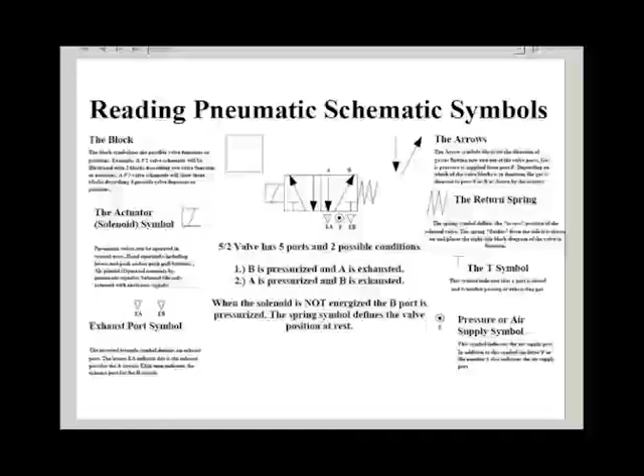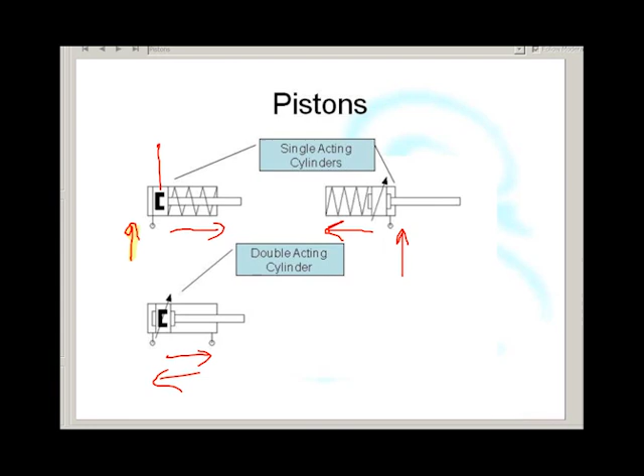In addition, there's some other symbols here. We've got this symbol here. That's a magnet. Any idea why we put a magnet in the middle of the piston? We put a magnet in the middle of the piston so that we can detect where it is. We put a reed switch there and a reed switch there, and you can tell where it is, whether the thing is in or out.

Now, one big problem we have with pistons is that if they're any sort of length and they have any sort of pressure on them, when they get up a lick of speed, they tend to get to the end of their line and smash right through the end of the cylinder, which is a big problem. To fix this, we use a thing called cushioning. What we have is like small sub-pistons inside the main piston.

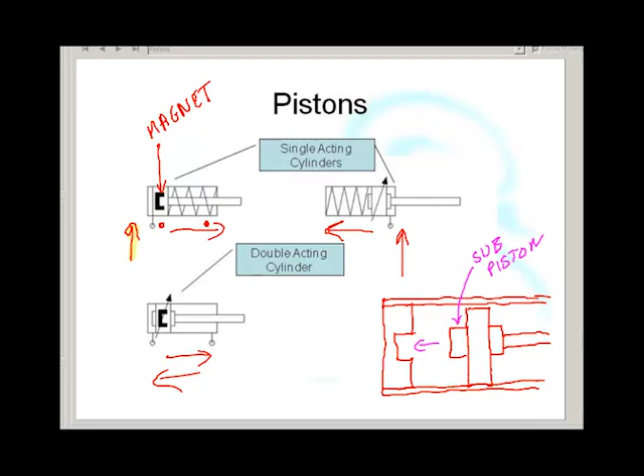And as this thing comes crashing towards this direction, the sub-piston engages in a very, very tight hole in the casting. And from that hole in the casting, there's a very thin air line comes through. And as the sub-piston engages in that hole, it cushions the thing. So it basically brakes it to a halt in a nice cushioned way. Now, the air hole is variable. So by having this cushioning, we prevent the piston blasting out the end of the cylinder.

So these symbols here, they're cushions. That's a symbol for a cushion. And this symbol here, that's variable. Just like in electronics and electricity, an arrow through something means variable. So these have got variable cushions, and what that means is when the piston comes to either end, it doesn't smash right through. It goes crashing along and then slows down at the very end as it's cushioned to a halt.

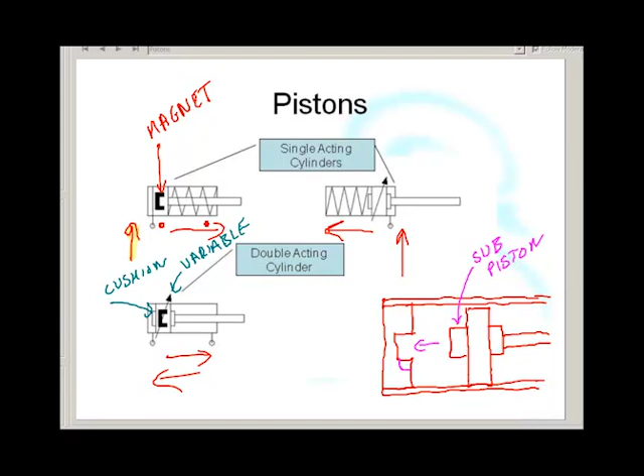Here are some symbols. Now, anybody wanting to go into this in more detail, I've found a very good site, and I'll just see if I can pull that up. It's done by the BBC. And hopefully there it is. If you can see this, I just published the URL there. And it goes into this in some more detail. There's pneumatic symbols there. Can you all see this on your computers at the moment?

Okay, so there's the first page, and it goes into it in some detail. And then it goes through, and, okay, the next page, it shows you how this sort of thing works. It's a little bit simplistic. It's meant for school children. But, you know, if you want more details of how it's explained.

And here we've got some typical symbols. I've got a 3-2 valve there. There's a unidirectional flow controller there. And a single acting piston. And when I press the play button, the piston comes out. It goes gradually more complicated.

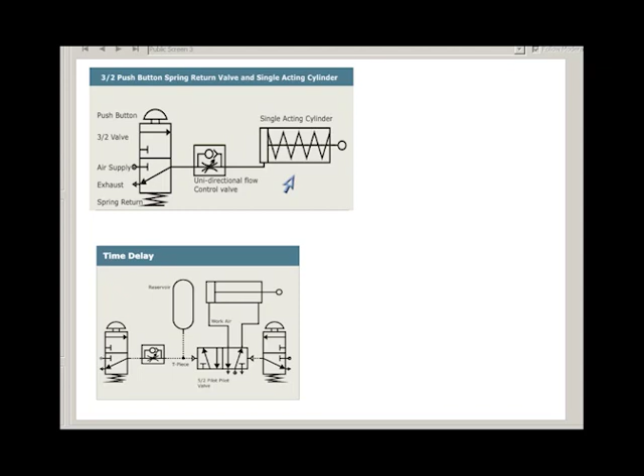So looking at this simple system here, just to make sure you can interpret this, what we have here is a 3-2 valve. It's got 3 ports, 1, 2, 3 ports. And it can be in 2 positions. Here we've got a block. That's the block for its de-energized state. When we push the button down, it goes to this state. When we push the button down, air from the air supply is connected across there, and the piston comes out. Hopefully fairly easy.

It's quite common for us to use lockoff to lock a piston in place. Here's a piston with lockoff. What we've got here is a 3-position switch. It's a 5-port 3-position switch. It's called a 5-3. In its central position, the cylinder is locked. If air can't come in and air can't go out, then it's locked. It won't move. We use this as a way of locking cylinders in place.

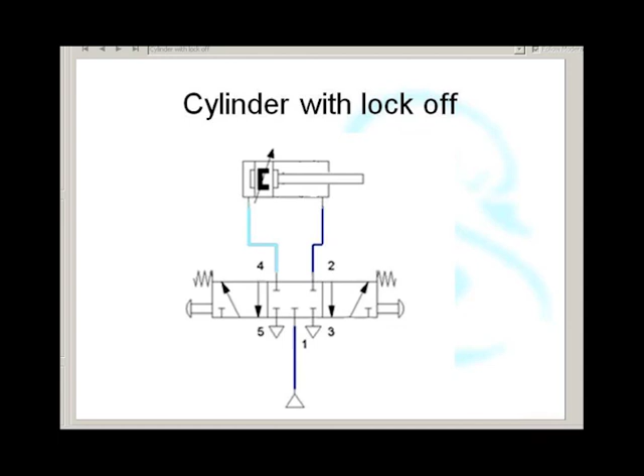Now, here I've pushed it to one position and the piston goes one way, because I've put mains air on the top and it goes in. Here it's locked. Now it's locked inwards. Air can't get in, air can't get out. The cylinder's not going anywhere. It's locked.

Now, a funny thing happens if we get a leak. I'm going to introduce a leak, and the leak is here on the piston seal. My piston seal is leaking. Now, this is what happens. I've got mains pressure, just going back, I've got pressure here. This side of the cylinder is pressurized.

If I have a leak on the piston seal, this is what's going to happen. It's going to slowly come outwards. Now there's no air in, there's no air out, but my piston is coming outwards. And there is no air in or no air out, but the cylinder piston keeps coming outwards until it's fully extended. Now, if there's no air in and there's no air out, why did that piston just come out? Any ideas?

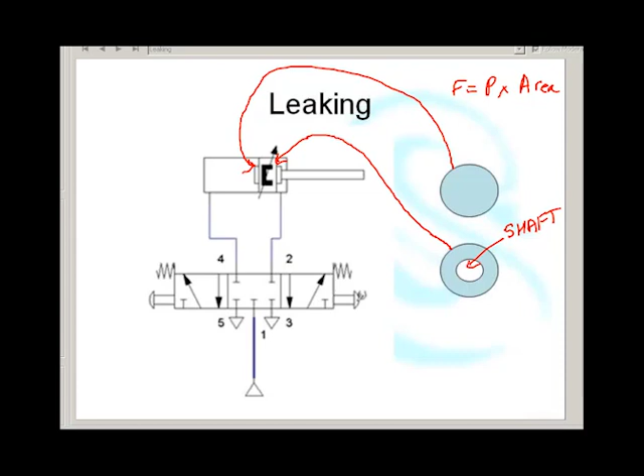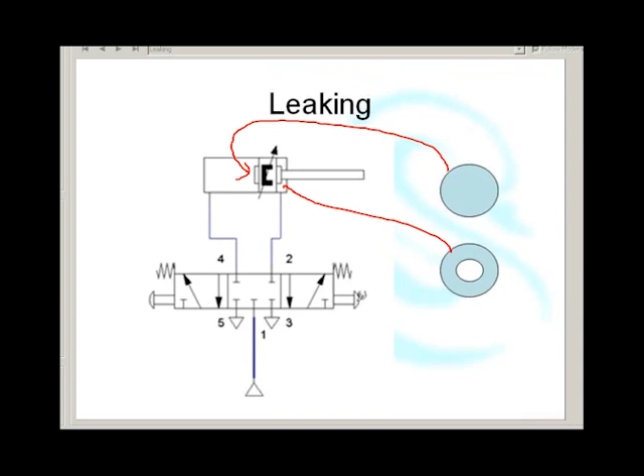It's all to do with surface areas. The surface area, hang on, I'll start that again then. The surface area on the back side of the piston is that. The surface area on the front side of the piston is that. The difference between the two is that on the front side of the piston there's a shaft coming out. So the back side of the piston has got a bigger surface area than the front side of the piston.

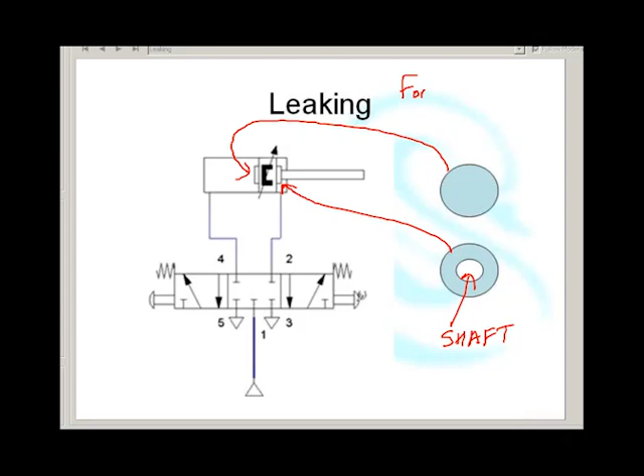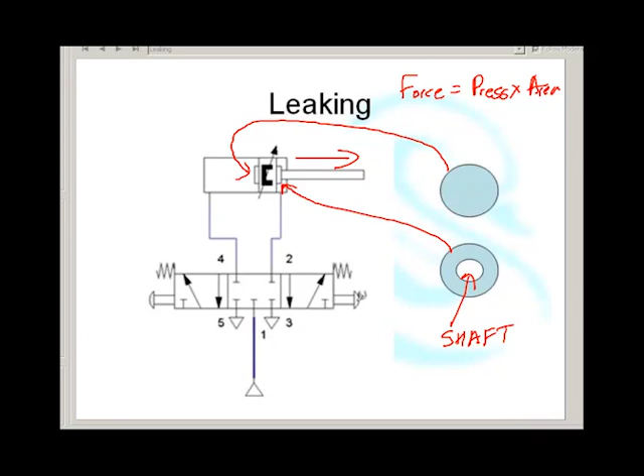And because force equals pressure times area, there's more force on the back side than there is on the front side. What that means is, if you ever get the situation where the pressure is equal on both sides, the piston will tend to come out. It's a magical thing to see happening. People don't believe it, but it's a classic example of a leak. If you have a leak on the piston seals here and here, the piston comes out.

That's something to bear in mind, because basically the failed position of a piston is out. Pistons will fail outwards. So when you're designing engineering systems, you need to design them so that their safe position is with the piston extended. Because in the event of the seals breaking and the seals passing, that piston will extend.

I've seen it on hydraulics, and people have said, we don't understand why the thing's still moving. We've turned off the hydraulic pump and it's still moving. It will move. There's absolutely nothing you can do to prevent it moving apart from repressurizing the other side of the piston. So this is something to bear in mind. Safety implications: a piston will fail outwards.

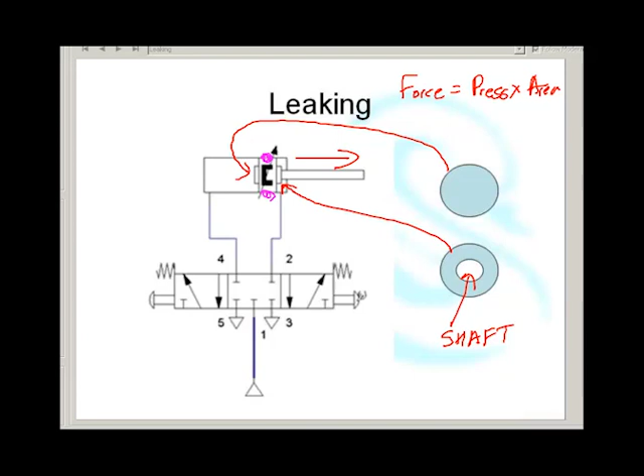And if you ever see a fault where a piston is slowly creeping outwards when it should be in its lock position, then the fault is that the seals are leaking. And the reason why it creeps out is because of the magic of surface areas. The back side has got a bigger surface area than the front side.